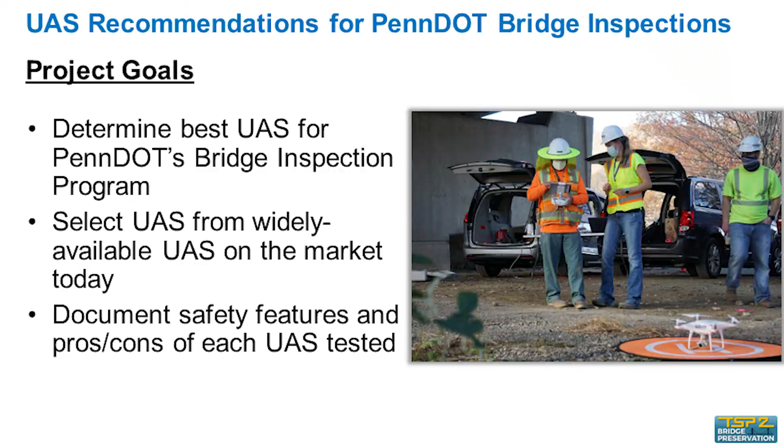But then we also wanted to document the various safety features of them. So we did a drone-by-drone analysis, and we'll talk later on about a matrix we pulled together that gave a holistic overview, not only of the application of each drone, but also looking at some of the benefits and features of each. Part of that was laying out, how does this fit into the day-to-day workflow? With that, we established that there's going to be 3 phases of the project.

We're going to evaluate the basic parameters for the airframes themselves. At an isolated location. We're going to pick a fixed site, do some routine activities with them, and get just that. How do they look in terms of routine bridge inspection? And look at the different variables, as I mentioned, from a general standpoint.

Phase 2 of it was to consider a complex scenario. So in this case, we were looking at a structure that was cable supported. So things where you may put rope access and have individuals rappelling the various lines. Well, can we run a drone up it, save time, reduce the at-risk hours for our personnel?

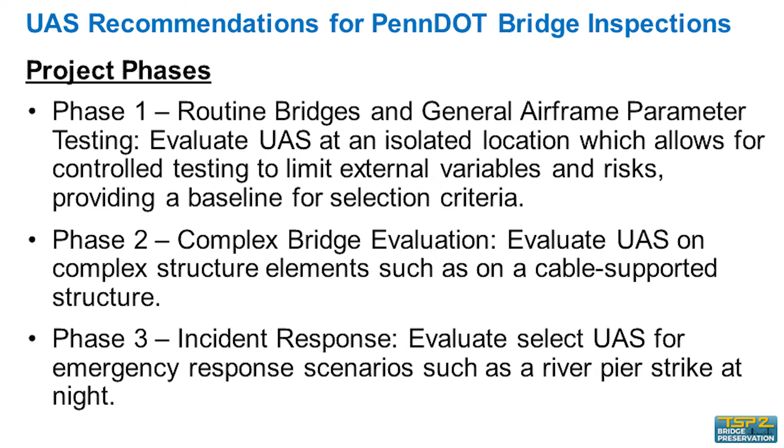Third scenario is we were talking with the district, because we did this out in District 11, which was the Pittsburgh area. They've had barge strikes to piers. So we decided we were going to do some pier evaluations and some night flight scenarios in case of a barge hitting a pier in the middle of the night. What do we do and how feasible is it?

Execution was interesting. As I said, this is during COVID. So we finally got to go out into the field in November of 2020. The one interesting factor that we ran into, well, this was days after the election. So as we're getting ready, a couple days beforehand, we're getting reports that there's possible rioting or civil unrest. Are we able to go do what we want to do still? Luckily, everything was able to work out and we were fine.

You can see, everyone was masked out in the field. Had to go through different COVID protocols. The internal PennDOT staff had to go through and get approvals to be out in the field during this time. We had our scenarios that we had to do for Baker to get our personnel out there, just to keep everybody safe. Had to look at getting a sound methodology.

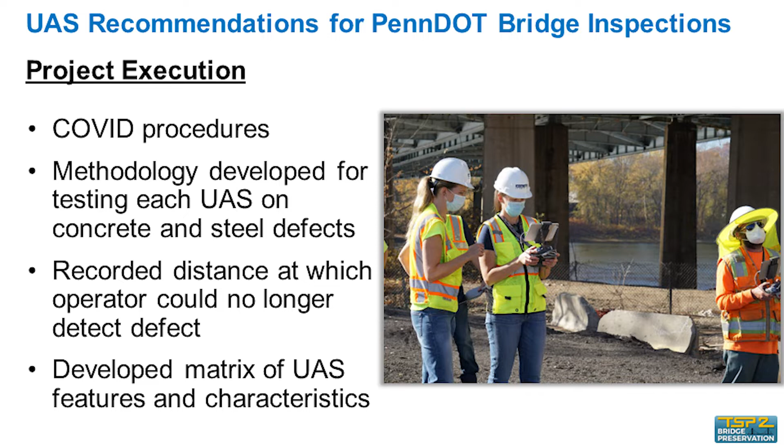So we established a methodology I'll get into a little bit later here to keep consistent and evaluate each drone on the same pattern. And we were using incrementation of how far it is away from a defect and things of that nature. That way everything's getting a fair shake. Also recording the distance at which the defects are no longer able to be detected. And as I said, we developed a matrix to run through and do this comparison for all of it.

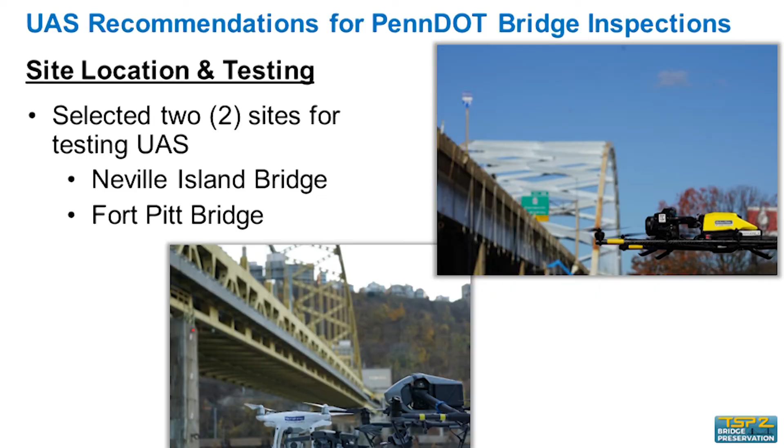Site locations, we had a variety of locations. We were trying to figure out what was the best fit for this application. Getting somewhere where you can get some complex features, but you also get that run-of-the-mill beams, abutments, piers, things like that. Now, we did scale back the amount of field work we would do with the UAS. At first, our primary site we wanted to use was Fort Pitt Bridge. You can see it's the second bullet though because of some of the logistics we ran into, again, during COVID and other aspects.

You see people that go out there and just take a drone and throw it up wherever. Well, you're not allowed to do that kind of stuff. So we liked Fort Pitt because of the open area and there was park access there. Well, you had to get special permission and a waiver to fly from the park because that's against the rules, so we didn't do that. We did use it as a secondary site because we were able to stay within PennDOT right of way and find a launch point that fit our needs.

But we also had a railroad there, and their right of way somehow extends to the moon, so you can't fly anywhere near that. And again, the civil unrest. So we settled on Neville Island. It was a nice structure that covered the items that we needed, and we'll get into what we established there as our primary site.

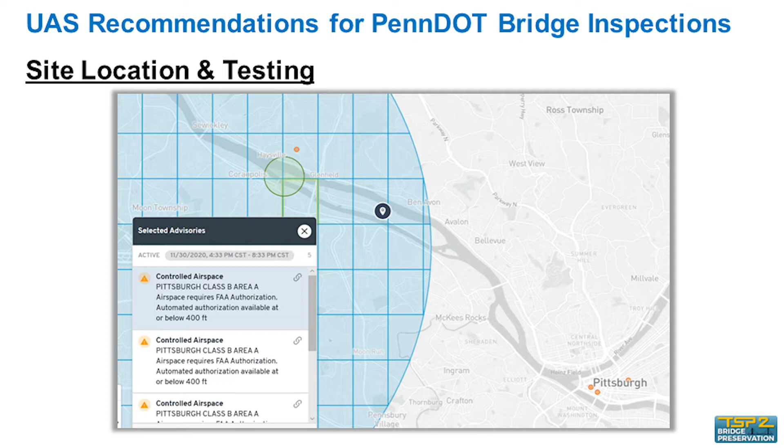So with the site location, Neville Island is in Class B controlled airspace. So we were able to go through LAANC, the Low Altitude Authorization and Notification Capability system, and we had all the paperwork to get filed, get things lined up, pray for good weather, and hope that it all works out.

And honestly, couldn't have asked for a better scenario as far as even wind goes and things like that when we did actually get to fly. Our pilots were able to do what they needed to do to get everything lined up and get that. So that site there is the Neville Island site.

So here's the group of UAS we tested. There's actually a seventh one that shows up in some of our documentation because there's a different variant to the DJI Mavic 2. We had a Mavic 2 Zoom that was out there that was PennDOT's. So PennDOT's pilot, we had one of their pilots on site at a couple of locations and did some of their own flying as well when we were doing this.

So in this case, at the time, we used these 6 in our evaluation just due to the availability and whatnot. Kind of broke them up into what we called 2 different form factors. So the top row there, not to slight them by any means, we kind of lumped them more as form factor 1, like a consumer grade. So generally more portable, lower price points on them, like the Skydio 2 there, I think is around $1,100.

DJI Mavics you can get off Amazon. So if any one of you start pining to fly right afterwards, you can go get one next day.

But then you get down into what we considered form factor 2, more commercial use. The form factor 1 ones are a fixed payload, where these guys on the bottom, the gimbals, you can swap out different things, like even adding in LiDAR on something like the Falcon 8 to get mesh scans and things like that. So a lot higher price point there in the bottom that we're dealing with.

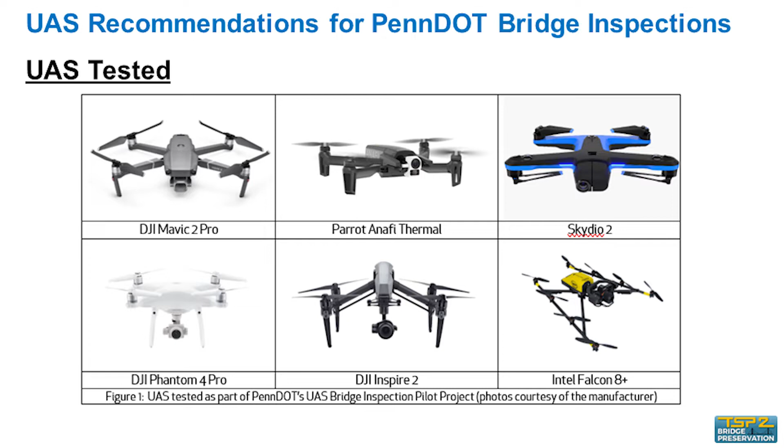Testing, I said the methodology. We had to come up with what do we want to do. Well, looking at defects, I can see a spall, I can see a delaminated area, the thing that's probably the hardest to detect is cracks. So when we're looking at the cracking, we honed in our work to focus on concrete, so we had nice concrete piers on Neville Island, so that worked as a nice control point. And then the approach spans had some good steel that we could get up in at.

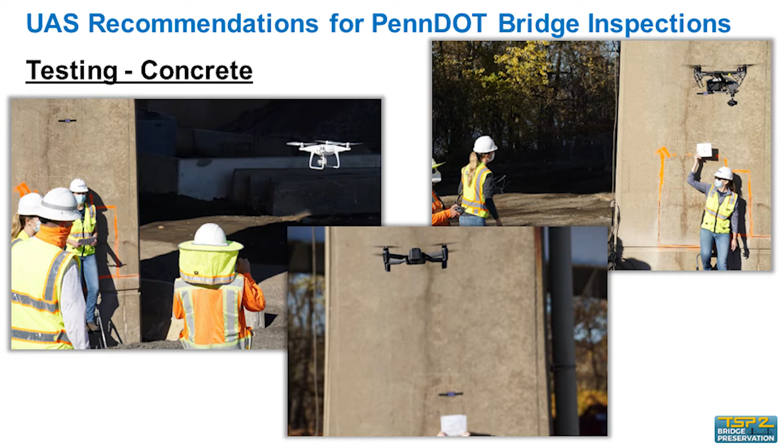And so we were combing through inspection reports and identifying previously identified defects so that we can use them as control points as we ran each UAS through it. One of the things we had to do each time, we want to make sure that we're calibrating the equipment out there. So you can see in the imagery here, there's a crack comparator card that's held up against there. So we calibrate all of them at about 5 feet.

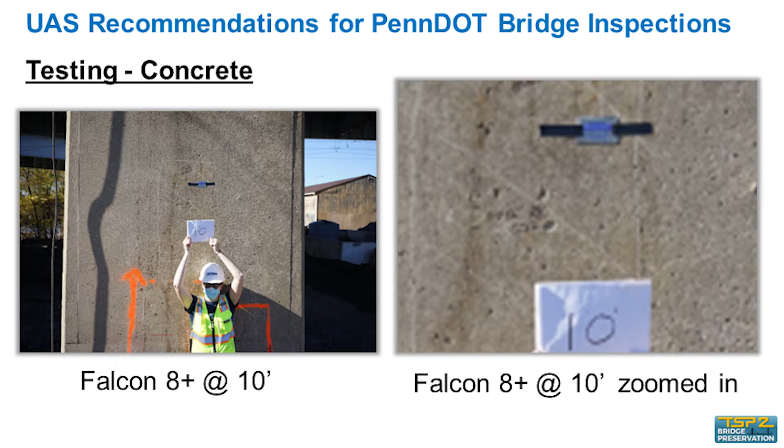And then what we did for both the steel and the concrete is we made demarcations on the ground at 5-foot increments going from 5 feet out to 40 feet. And what we would do is we would get the drone positioned in at each spot, capture the imagery, pull it back.

I'll say here that the imagery that you'll see here, if you're sitting there like, wow, I really can't see the crack in this photo or that, these aren't the native photos. So obviously with them being in the PowerPoint, they're a lower resolution. It's quite different when you're looking at the native photo, able to zoom in on it and see the detail that you can actually capture out there with the equipment.

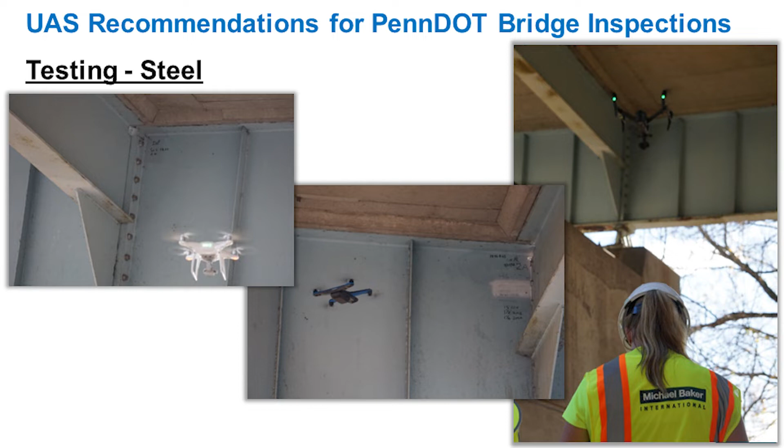Wanted to consider, like I said, the concrete, steel, and then we were looking at cables as well. We didn't have any pre-stress elements out in the field at this location, but we did have cracking that was at the upper threshold of going into CS2, so that's what we used as a control point on that same pier.

Again, here's just some imagery showing the Falcon 8 at 10 feet, and then a zoomed in image of it. Again, not native photo, but you can see how we had marked on the pier there. Got our .012 for the RC, reinforced concrete, at CS2, and then right above it, kind of clipped out of the photo, was our control point for our pre-stress.

And we just kind of, on each one, when we pulled the next drone up, we would go and snap our 5-foot increment photos. We maintained the same pilot the whole time. We wanted to get rid of pilot bias, where maybe someone favors one type or another, by having the same pilot evaluate everything, and they can contribute the look and feel that they had, what worked better.

So we had our chief pilot out there that's got the most hours in out of our group, and so he's a real good control point for it, given his experience level, to try to eliminate some new person just about ready to wreck or nervous to fly around a bridge.

So we also evaluated sensor capabilities. Some of the units, we were able to break apart the tablet from the controller so the pilot could focus just on flying and someone else could control the lens and the aperture, so we recorded that information as well. Lighting also made a difference, depending on what pier you're hitting, where's the natural lighting, and then some of it you could photo enhance after in post-processing.

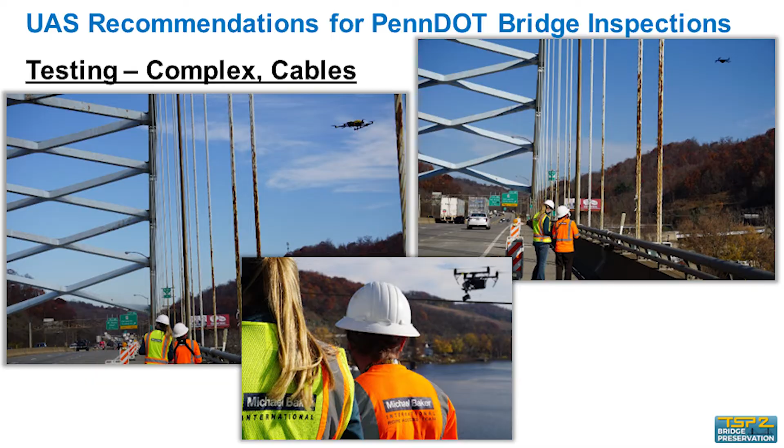And then we went on to our testing with complex cables. Typically we would go and do like a shoulder launch, and so we can put a TMA behind them for protection. This prevents, like, if I had to throw a man lift out there and I've got tires now jutting into the lane, I have to do a partial lane closure. So you can save on some things like that.

In a case like this, we would typically have a rope access team at the connection points doing a more detailed look, and then you can scan over things with the UAS. So just reducing, again, that personnel at risk hours. And you can get a good 360 view as you're going up and down with the UAS there.

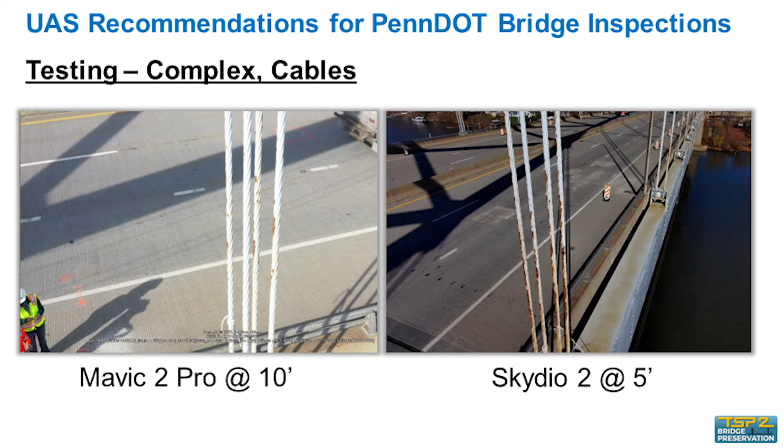Just some of the imagery here from the Mavic 2 and the Skydio 2. And again, that Skydio honestly surprised us a lot throughout this of how well it performed, and it has a very nice price point, and it's very compact.

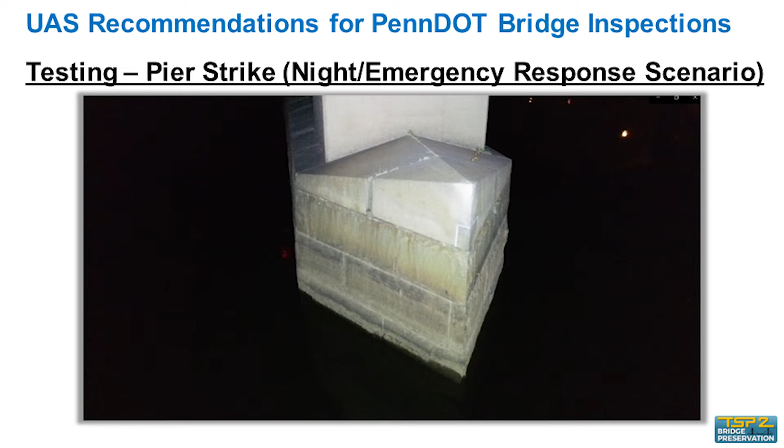Phase 3, we were talking about pier strikes. So what we ended up doing here, we're doing these night flights. We didn't do anything with what we called form factor 1, the consumer grade, because it can't handle the payload needed to illuminate things. So down at Neville Island, we had to consider putting Lume Cubes on the drones to get the area lit up well to try to simulate this.

The imagery here is a little video where we're about 20 feet away. And I think this is the DJI Inspire 2 when it's going around. You can see with the masonry, even though the video looks a little jumpy here, when you're looking at it native and in high res, you can really see some good definition in the masonry for inspection.

And again, in this application, we're looking at kind of an emergency quick assessment to get out there. So I may just need that safety factor to know that I can return tomorrow with a full team and closure.

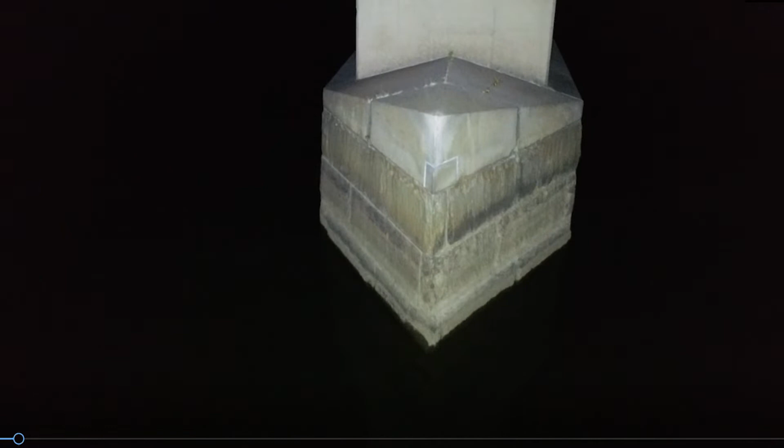That was the scenario we were kind of working with. So we did learn that with the zoom features, as the zoom would adjust on any of these, you had to control it and lock it down, because as the zoom adjusted, it would change our light aperture. And so we'd start to lose quality even with the Lume Cubes and such. So you had to keep that in mind.

And then here's just a video showing, I think there's audio too, Brian's doing the piloting and Alicia has the controls, and so she's adjusting that light as she's going. It makes a nice two-man team then, where he can just keep line of sight on there. One of the important things with night flights, typically you need a waiver. I mean, FAA wants you visiting a site during the day prior to any night flight. So if you're kind of trained and versed and ready for an emergency application, great.

One of the things with the pilot you have to protect is night vision. So even while we were out here in the field doing this, we didn't have an ideal takeoff location. We actually found an old traffic sign that was laid down, so that became our launch pad. It's kind of brutal standing there because about 10 feet away from that was a dead deer. So that made for some really aromatic flights. And especially when everything would settle down, you're good, then the props would kick up, and you're like, oh man.

Brian would have to look away when anyone went to take a photo or anything so that he didn't get that flash and reduce his visibility, so he could keep line of sight on the drone when he was out there. So just some issues we ran into.

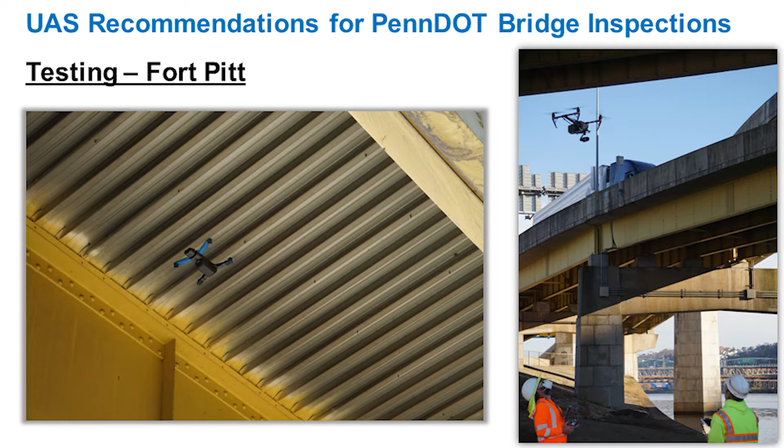Again, we did get to go out to Fort Pitt. This is a nice example of the Skydio getting up in there. The photo on the right is actually the PennDOT D11 pilot that was out there with Brian. Brian's our pilot that's on the left there. Got some time with him, and he got, like I said, the Mavic zoom out.

Here's a video. I can't speed it up, but this is showing you the Skydio going up between the members. And it doesn't come out as good as we'd like. The native video is better. Once we get up there and we start adjusting, you can see how dark the top of the bottom flange is. So that's where it's key to have that other operator be able to adjust the light aperture to handle that clarity. But here's where you'd start advancing that and getting better quality. But you can see how stable the Skydio is in between the beams there.

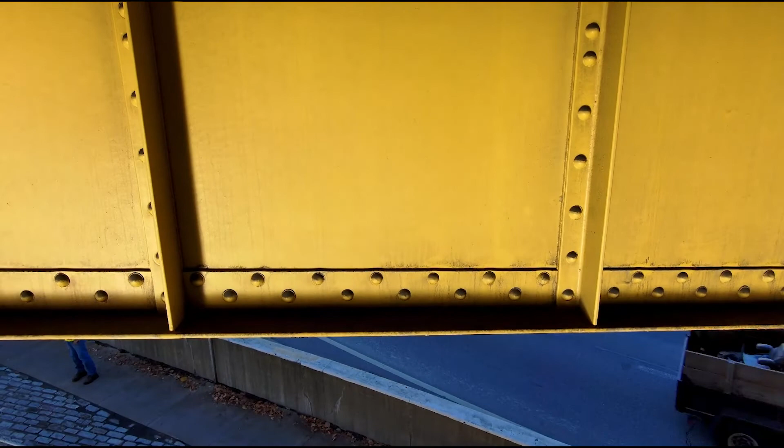More testing with the pier strike. This is just showing the Lume Cubes that were lit up. The difference with Fort Pitt, completely different experience. There's so much ambient light. One of the things we had a concern with there, honestly, was flying too close to any of the decks and having a bunch of passersby looking over, rubbernecking and kind of getting lost in things.

So, quick example of the takeoff. That's the Inspire 2 lit up with Lume Cubes. And then the strobe on top, you have to have strobing on these. You need to be visible from 3 miles away with the airspace that we're in.

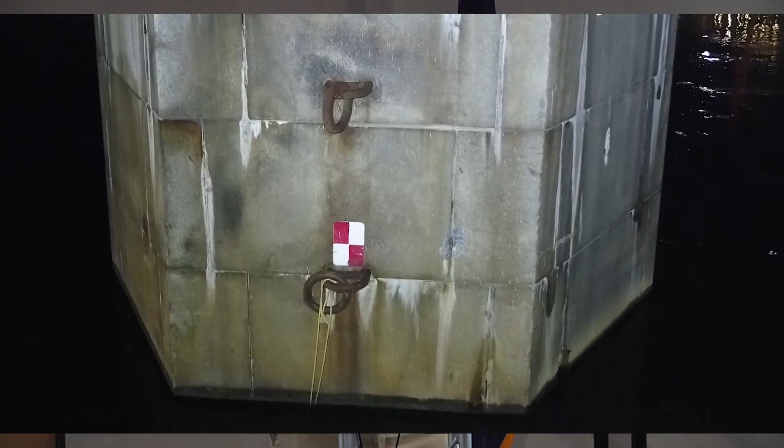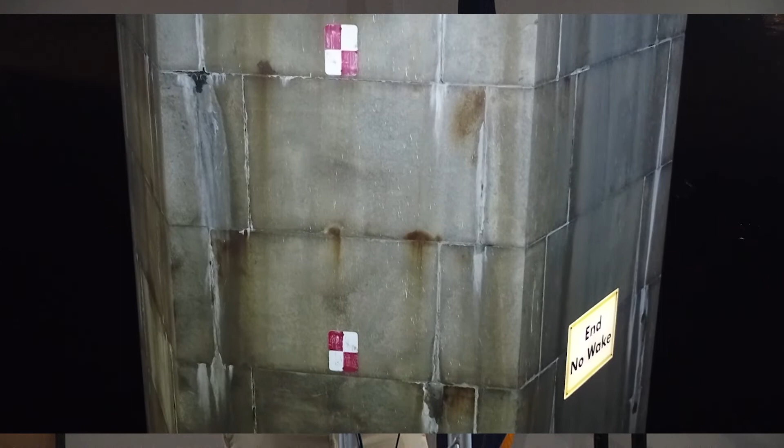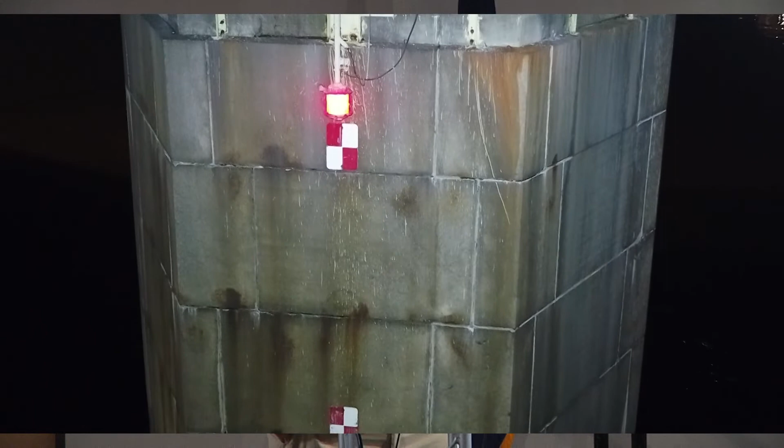So, really good image quality here on this pier. The problem with this video clip is it's longer and it won't let me jump ahead, because when you get up to the steel you can see the quality that the Lume Cubes give us and the details on the bearings and such, it's a pretty nice image here. So I'll just let it creep up. But yeah, everything slow and steady movements with all the drones. Again, just from a control standpoint, the commercial grade ones are what we liked using.

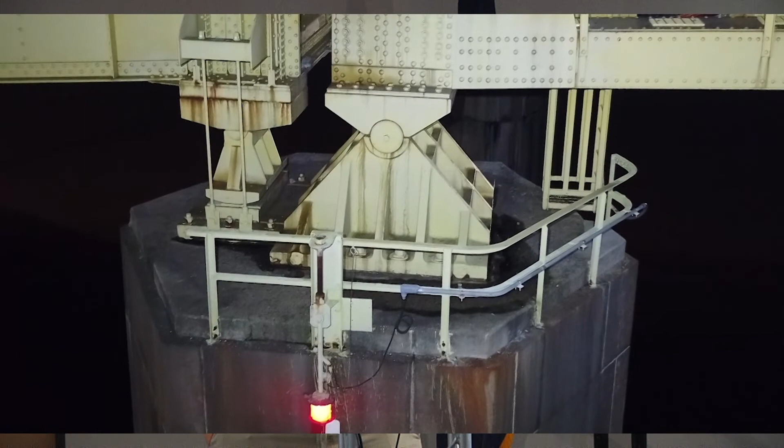And what we'll do is, in the couple minutes we have left, I'll have the matrix I'll run through and kind of what some of our findings were. You can see it's a really tall pier. But here you can see just with navigational lighting, but say we have an issue like, you know, bearing tip or something like that, we can get in there, get good imagery, and you can see that it's got pretty good video quality.

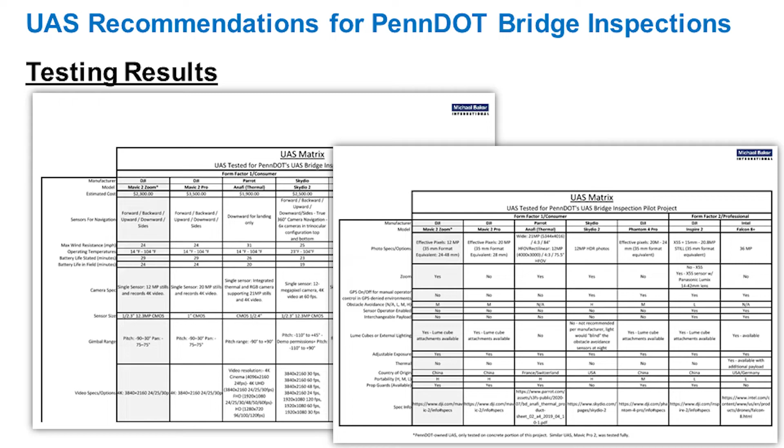Looking at the matrices that we created, doing the comparison, we looked at things as simple as what's the manufacturer state the battery life is, and what did we actually get out of it in the field. Went through different manufacturer specs, but then we also took that pilot perspective into it. You know, how did Brian feel with flying each one of them? What scenarios?

And it was interesting to find that when one would excel at one area, it usually failed in another. So like the Skydio only has a 12 megapixel camera on it, so it's not that great, but its obstacle avoidance and stuff, it's phenomenal for getting up into the tight spaces. So it's a good application for like a more routine area, but if I need to do something more complex, more detailed, I'd go to something like an Inspire, get that higher res, better camera, or the Falcon 8, which is 36 megapixel.

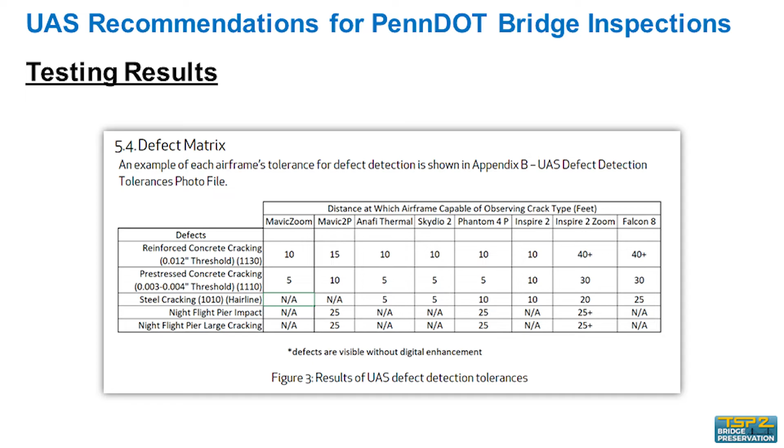So, and then with that, we created a defect matrix. Kind of see how with reinforced concrete, you know, most of the drones, you can perform at around 10 feet and that's good. You want to kind of hold within that 5 to 10 foot, and when you're calibrating, that's what you get. You get line up where we're at and make sure that you're operating in those parameters.

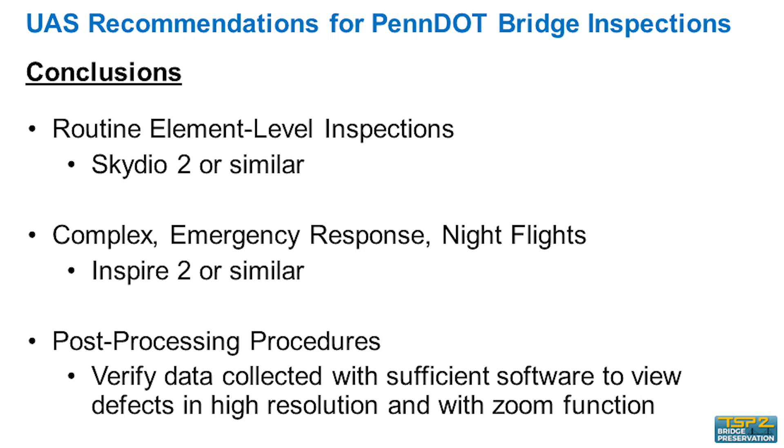So conclusions, we said routine element for phase 1, Skydio 2 or similar was good. For a complex application, the Inspire 2 or similar. You know, Falcon 8's great. It's a really high price point on it as far as getting that out there at times. Like to purchase one of those for a fleet just doesn't make sense. And then it's good to have the right software and whatnot for post-processing.

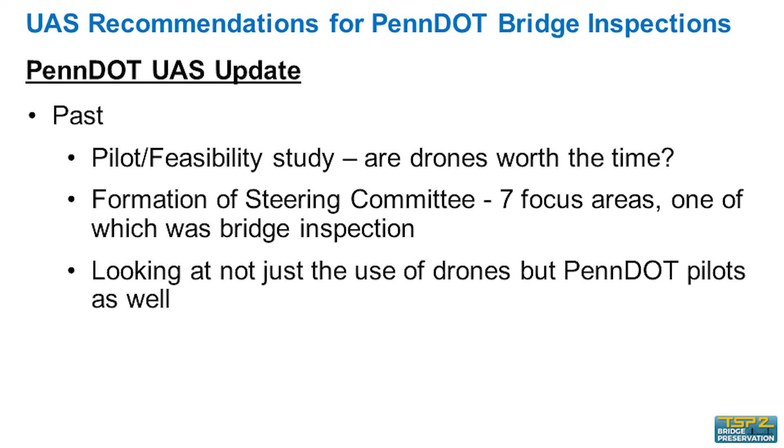So updates for the UAS with PennDOT. It concluded the feasibility. There was an official report submitted to the steering committee. They were looking into setting up more PennDOT pilots and establishing training. So currently there's a Pub 840 out there, which is the UAS policy manual right now. They have tiered training that's in development. I think HR is looking into certification and such on the PennDOT side.

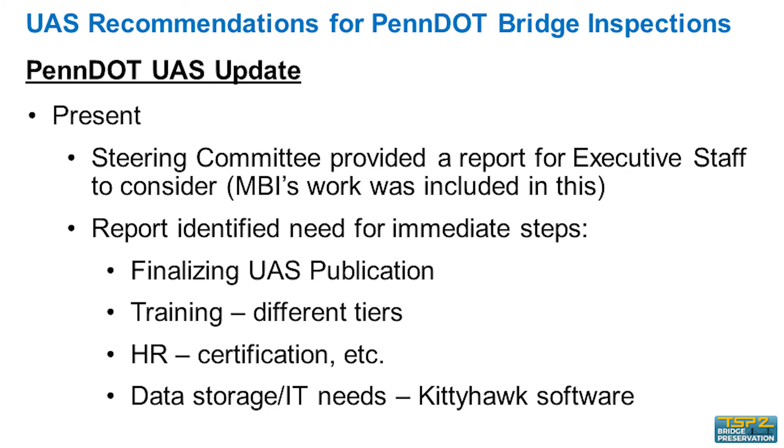And then they've determined a data storage, because it's great that we can collect all of this stuff, but it's how do you process the data? Big data is great, but you need to know how to leverage it. And with that, so in-house future things, more recruitment of pilots, equipment purchases, and then just start working towards getting that internal staff trained. And then as far as the consultant world, make sure that you're showing your ability and you can get out there and start flying. So with that, that's the recommendations for PennDOT.

Will, thank you very much. Great presentation and a lot of great work. I've got two questions. First is like any part or this report as a whole about the results, is it public that we can actually access and, you know, look at some of the findings? Or Rich, if you know it's going to be public? We have it available. I don't know that we've posted it on our website or anything, but you know, we've given the presentations at several conferences, so we do have it if anybody would like to take a look at it.

And my second question is regarding, you know, those kind of nighttime inspections that you did, plus the lights, because I saw that there were like these bright lights on the drone itself when it was actually flying. How much of an effect did those lights have on the total inspection duration before the battery dies and you got to come back and change the battery? And how disruptive did you find that? Yeah, I do believe that it shrinks the flight time. I forget exactly what it was, but you might only be looking at 30-minute battery life there.